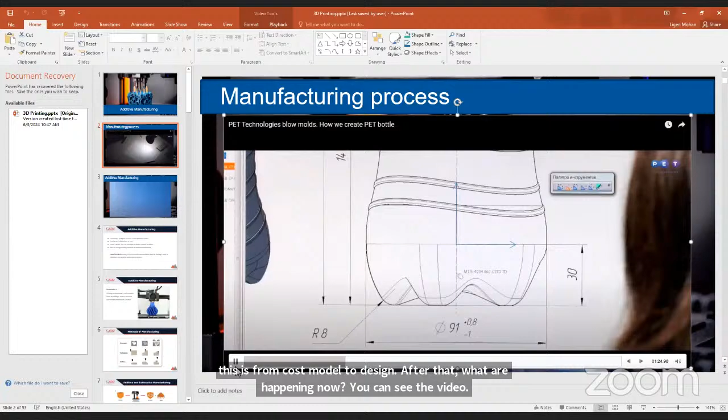After that, what's happening? You can see the video will stretch to more than one minute. But here it stops, right? No need of going to the next stage. Once we get the 3D model, that is what we need for additive manufacturing. Just think about it: it's a concept model going to a 3D model, and after that a lengthy process to get to the real bottle.

But when you go for additive manufacturing, once this model is ready and satisfies the constraints or parameters for the particular bottle, then it goes for manufacturing. Not a prototype. You can directly get the output of a real bottle immediately. So the traditional way takes too much time as well as being very costly. Designing and creating a mold is more expensive.

And there is no second choice. Once the mold is ready, you have to stick with it because there is no chance to do it again. If the design is improved and you make changes, the mold can't be used, and we already spent too much money on molding. So we just finalize and go for that. But with 3D printing, if the output is not satisfactory, we can generate another model or make modifications. It will not affect anything.

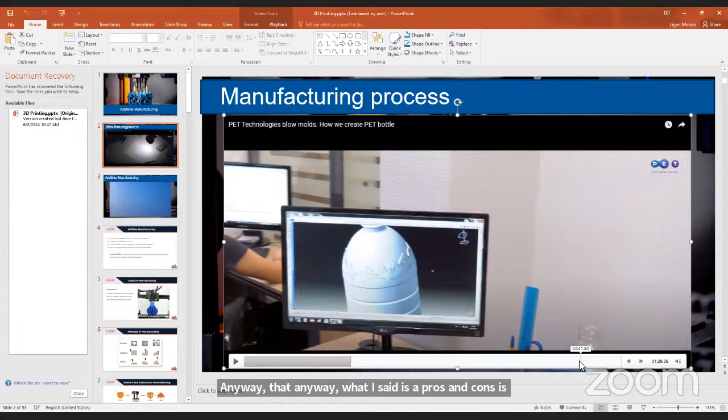Anyway, as I said, there are pros and cons. When you go for mass production, there is a lag between the traditional way of manufacturing and what we do in 3D printing. And what is additive manufacturing? A simple video for this also.

Just a minute. Can you see my screen? Yes, sir. You can see. Okay, fine. A small video.

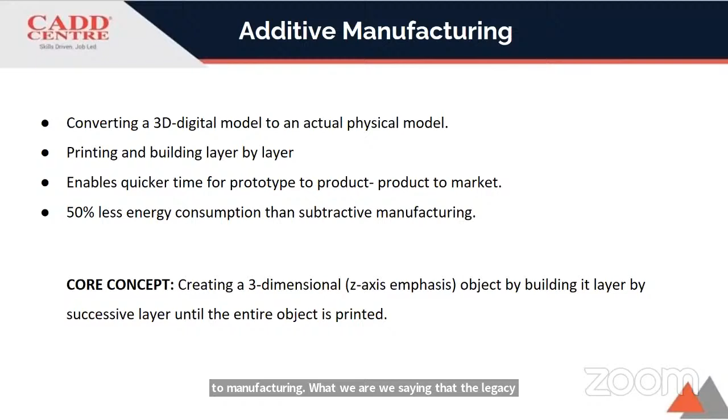And it enables quick prototyping and product to market. Nowadays whatever you want, you can just print out and use directly, with no waiting as in traditional manufacturing. It uses 50% less energy than subtractive manufacturing, the legacy type. We can't change that immediately, but it keeps going.

Now the lag is only for mass production. We have different types of printers available; even metal we can do. But the problem is when it comes to manufacturing at a vast level, or mass manufacturing, there is a question mark. There will be a lag in that. So for some objects we don't use mass manufacturing.

Mr. Tiraj sir told me they're using it for aeronautical and space research and all. In that case, we don't go for mass production. Whatever is wanted, we just make with 3D printing. In that case, 3D printing will be very much useful.

And the core concept: create a three-dimensional object. We can use various tools such as CATIA, SolidWorks, NX. There are vast tools available, but those are not the familiar tools; not only the basic tools are used. These are from German and French companies, so they are very good companies. Users the world over are using them. But now people will be pulled to 3D printing. So that is the next revolution, the next generation we will see.

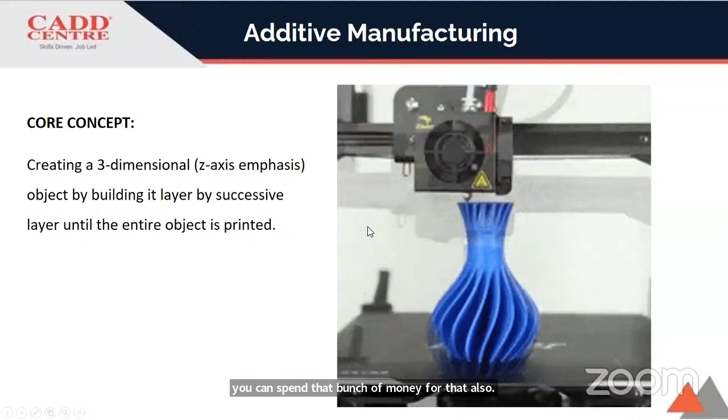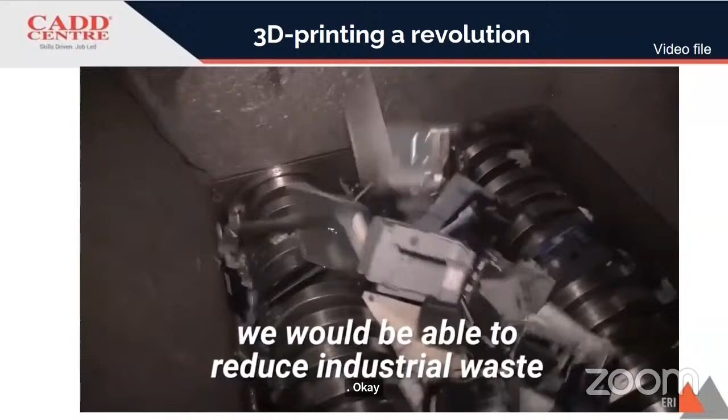The assembly line, providing a significant reduction in the cost of components, eventually leading to applied innovation. Even more so, we would be able to reduce industrial waste, try more experimental designs, produce finished products much faster, and create highly customizable products.

Restaurants would be able to 3D print dishes that are not just based on your preferences, but on your specific biologic makeup. You would see it used in the acceleration of space programs, with additive manufacturing becoming a key component to the future construction of our space colonies. Doctors would be able to print custom-made prosthetics and organs. Clothing stores would allow you to order designs completely from the convenience of your home.

This future is not too far off. How do you think 3D printing will impact your future? And do you think 3D printing's impact matches its hype?

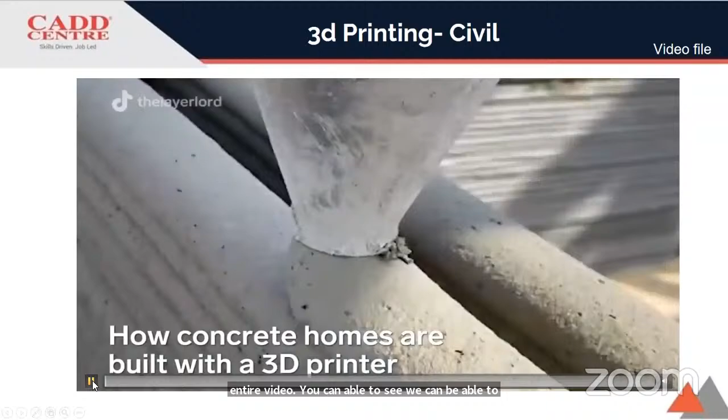Yes, so you can understand that there is no field where they are not used. Almost all fields can use it, not only the mechanical sectors or automotive sectors. You can see, I'm not going to run the full entire video. We can print an entire building with a 3D printer. It's a huge printer actually.

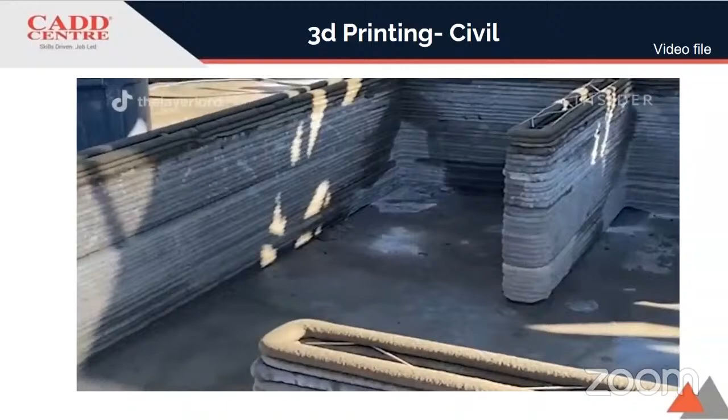Okay, so I hope you can understand, right? So you can use it in the engineering sector of civil and also the architecture side. Hope you understand till now, right? So till now, any queries from your side? If you want to ask any questions, then let's go to a few more slides.

Before that, I just want to know if you want to ask any questions regarding this. Now you can get a clear idea, right? What is 3D printing, and which industries are using it. And whatever is shown is very few. It's a vast range of industries using 3D printers. Do you have any questions or queries?

Sir, can we use this technology for the baking industry? Practically, has it been used? Is there any example you can give, around Chennai or somewhere, where any bakery uses 3D printing technology for making cookies or cakes or different wedding cakes or something of that kind?

Actually, sir, we are in Chennai. I'm not aware of that. At Bangalore, companies are doing it. I'm not sure about that, sir. But they are doing it in the pastry industry also. They are using 3D printing, and burgers and patties are generated by 3D printing. I'm not sure which company is doing it.

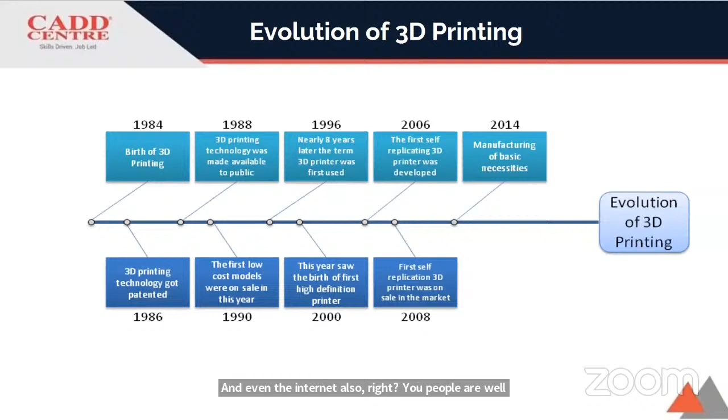So actually, it started from 1984 itself. Like that, all the technologies and software, like CATIA and NX, were previously used in defense, and even the internet also, right? You people are well aware of that. So once it is established, then it will go for the civilian version.

So we are not only speaking about a few areas like healthcare and construction, but also the food industries and bioprinting. I have a very good presentation we got from Hyderabad. The company is printing even the heart and kidney in 3D, but not for humans. They are using it at the mouse level. They showcased their printers, and the cells should not die while printing. They have a high level of criteria on that. So soon there will be a breakthrough in that.

Like food, biometric is also very important, because of kidney transplantation, heart and all. If we are able to do it in a printer, then it's cost effective and life saving also. So this should come first in my perspective. Fashion and architecture are already doing well in that. Then the jewel industries and replacement. There are almost no industries that are not touched by 3D printers. Mainly they're concentrating on the user end part.

For all the parts you need immediately, you can't get them, or you don't have any spares, because whatever we are manufacturing today in 2024, after 2 years we can't get the parts. That makes changing very difficult. Then we have to adapt and go for another new product or new vehicle. So if you have a printer, we can do a 3D scan, generate a model, and go to a 3D printer, and also go for jewel design.

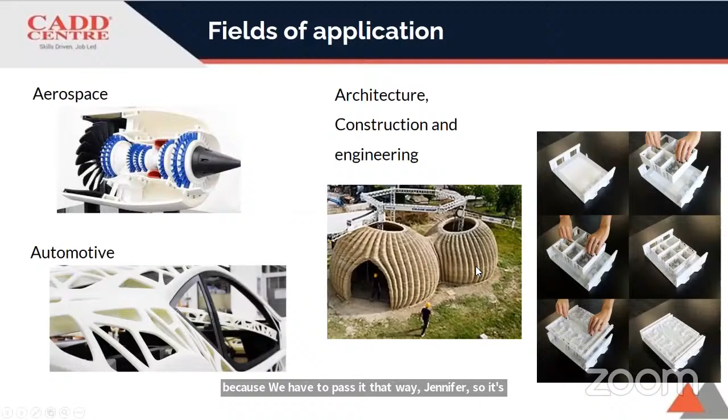And the workflow. So how do we do that? We start from the concept model, then we go for building a 3D model using our software. For the concept model, what we are normally teaching till now is paper with pencil.

Once the concept is developed, we go for clay, then it goes to the next level. Next level only we go for 3D modeling. Anyway, this is only for the slide presentation, I go for that.

Once the 3D model is done, we convert it into STL file format. Once STL is okay, it goes for printing. STL is a neutral file format, you can convert it to neutral file. There are many tools available, it's a free version only, not a paid one, and it's suitable for 3D printers.

Once 3D printing is over, it goes for post processing, because you want to make coloring, buffing, and there are so many processes to make it have an aesthetic look. Then once that's okay, painting and assembly, then it goes for output.

If you go for the same thing in a traditional manufacturing way, it's a lengthy process and the cost is too much heavy also. But if you think about mass production, then it's okay. At present, I can say it's otherwise more easy using 3D printing.

Only concept modeling, the file is not that much of a big deal. You can do it in 3D printing directly. We can just spend time on how to go for structural support and brims and all, then we can go for 3D printing. Only 3 steps, simple steps.

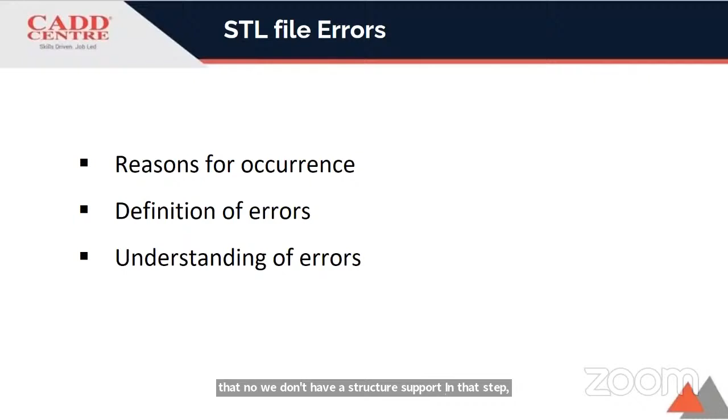The software itself nowadays - we are using Cura for that. In that software, they will show this, and you mandatorily have to create a support to keep the particular 3D print stable at some height. So that's a very interesting fact when you're using the STL file.

So here we can see, as I said, Cura, Prusa Slicer, Cura, and there's Repetier as well. Just take a screenshot. If it's a free software only, you just generate a 3D model and put it inside. You can see there are only a few options available. Cura has more options.

When you go for Prusa, it's very easy to understand what 3D printing is and how they're working. You can understand how the printer or software is working. Once you go for the printer, it's different because we have to set the base table and the movement of the object to zero level, check if the plate is perfectly horizontal or a little sliding, and sometimes you can't remove the print after printing.

That is also one problem we'll be facing. We will not remove from the base plate. So you can see, this is not too flimsy. If it is stuck with the bottom, if you pull this, what will happen? The feathers will come out.

So what we do, as a practical knowledge, we go for the glue gum, normal gum, the Fevistick gum. We used to put it on this plate and make a print so that it will easily come out. But initially it will be tightened because of a hot material. After that, you can simply remove that, it will come out. Otherwise, it will stick on the board.

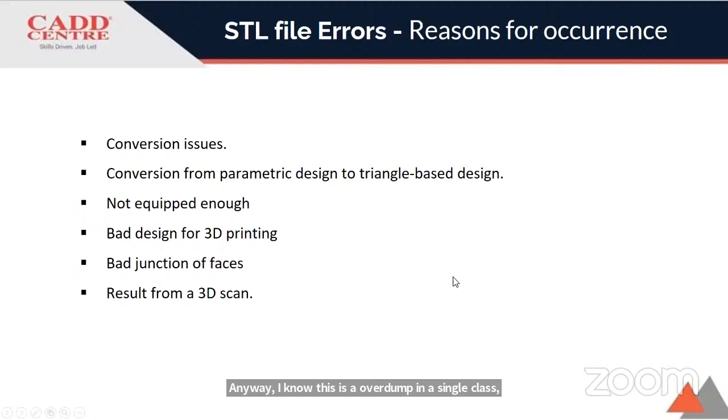Anyway, I know this is overdone for a single class, but I'm just giving the awareness of what we do in a 3D printer, what the behavior of 3D printers is.

And invert normal, if you have any bad edges or a shelled component, overlapping triangle, intersecting triangle, this is all the problems we get as errors when you go to print. Right, everything in the STL file, what you are getting from the STL file to convert to slicers.

Okay, this is the triangle, this is the triangle. When it prints, it will be printing in a triangular manner. If it is flipped or the normal is in a reverse direction, then it will be an error. So normally it will not come as an error if you model it in a proper way.

If you're going to twist the object in a different way, normally we used to go for a 3D model, we used to twist and get very solid to very complex surfaces. And in that case only we have a problem with that. But the 3D printer has the capability to create any type of model. But if it is a true model, then it's okay for that.

So this is what they are calling a triangle. So this is what a bad or nearly bad contour hole. If you have a hole, this is what I explained, right?

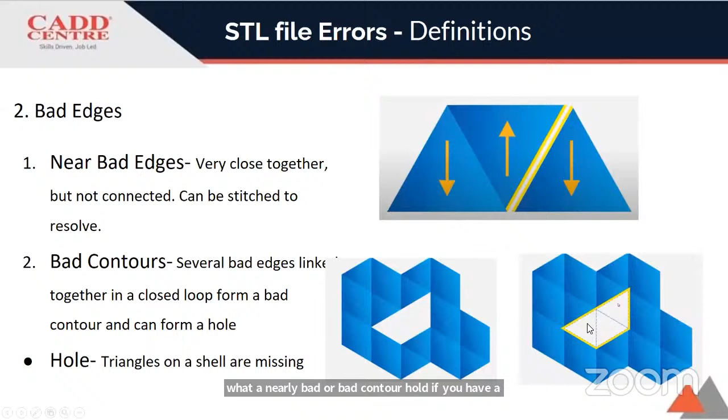If there is a gap, then normally when you go for a scanned model, we can get this type of problem. Same like that, shelled. Shelled means the object looks fully solid, but if you cut and see, there will be a shelled component. If it is fully shelled, then what happens when you go for the printer? It will not print, right?

It will, because it tries to only go for the outer, that top portion. When you go for the top portion, what will happen? Nothing. Again, it will be pouring inside. It will take too much time. Then you have to give structural support starting from the bottom; you have to give the proper way how to do printing in the solid thing, whether you want it hollow or solid.

Okay. So this is an intersection. If it is an intersecting object, again, you have a problem with that. So that is a noisy shell. Shelling inside the smaller part, the inner portion, the intersection portion will be creating the problem. And now you can understand this.

Here you can print up to this level. This is the triangular box, right? Your box will be printing at this level immediately. There is a gap from here, so it will not immediately come up printing. So here the brim will come and it will come up with the structural support. After that, it will be strong printing. From bottom to the top, up to the object level, that will be structural support. After that, it will go for the normal printing. So this is the instruction you have to give to the part.

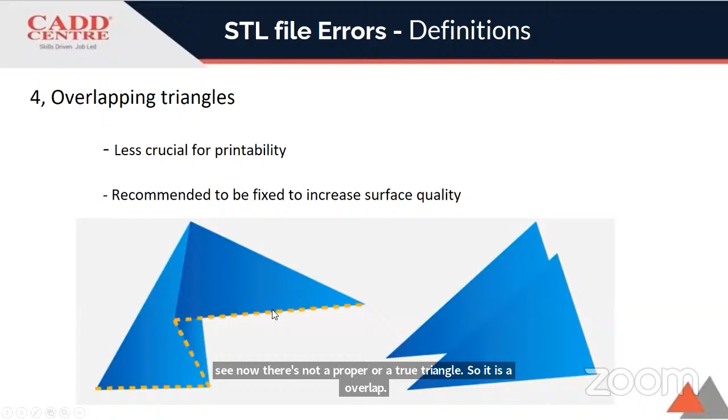Before 3D printing itself, you can understand what is happening in that. We have a solution for that. But whatever you want, you print, that is also an option. Whatever happens, you print. Then you can see it takes 4 to 6 hours, and then you are not getting a proper output. That will be difficult, right? If it is for testing purposes or a learning period, it's okay, but if it goes for commercial use, it will be difficult because time is a constraint. We have to do it better and faster.

Anyway, whatever we do, we have to practice on that. In printing technology there are options: directed energy deposition, photopolymerization, material extrusion, powder bed fusion, sheet lamination, binder jetting, and material jetting. So these are the types. Within 3D printers there are many types in different forms. I'll just go through them so that you get a clear idea. I'm not running the entire thing, as it would take time.

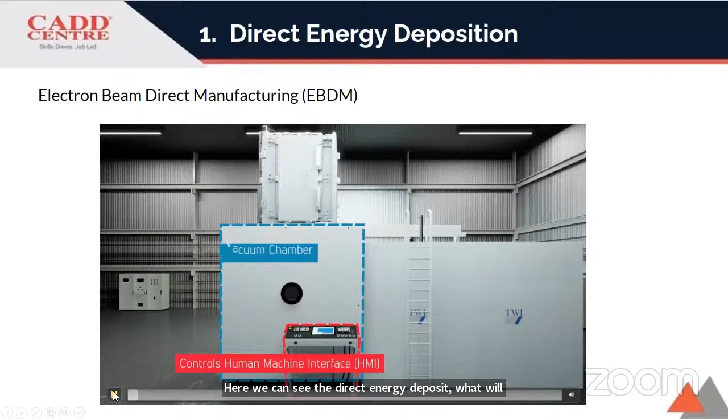Here we can see directed energy deposition. What will happen in this? There is no audio on that. Just mentioning the name. So this is the slicer, level by level.

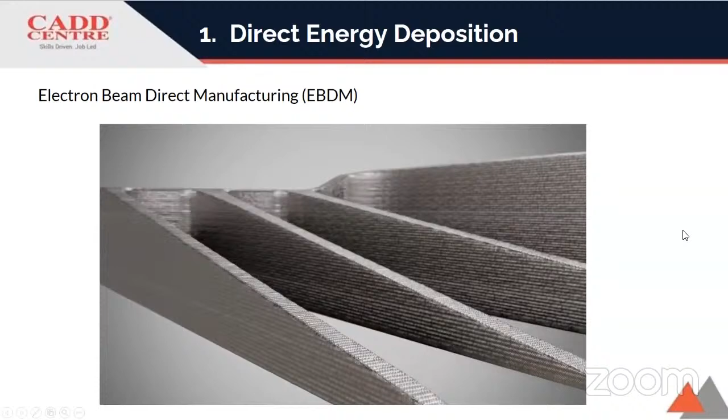It's a layer by layer welding type. So that's EBDM, which is used in vast areas.

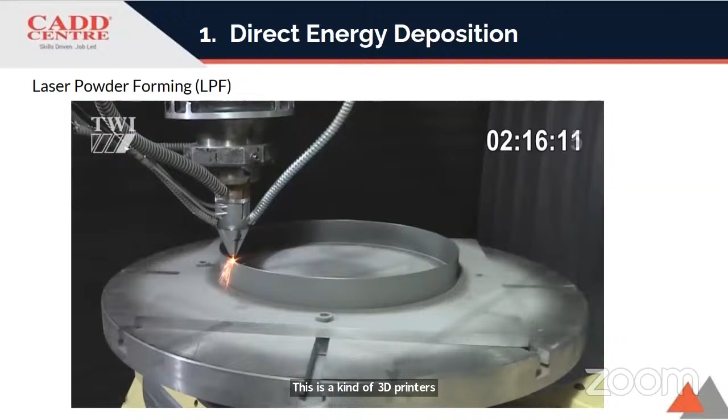So let's go for the last print, right? So this is the output directly. This is LPF, laser powder forming. And there's digital light processing, DLP.

So in this, we can go for very complex shapes also.

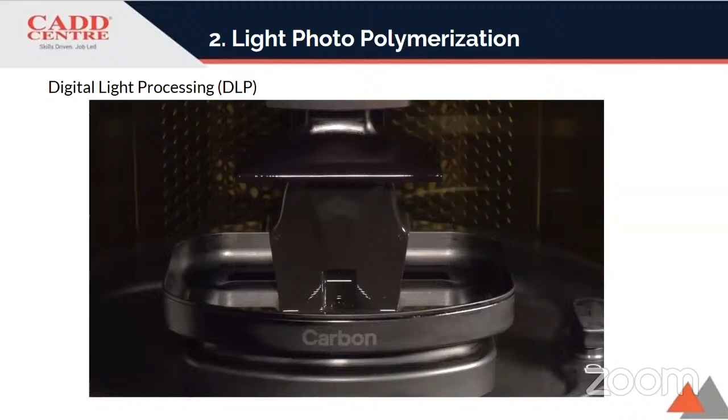So it's interesting, right? DLP. Then SLA, stereolithography.

This looks like some science fiction movie, but it's real. So this is additive manufacturing.

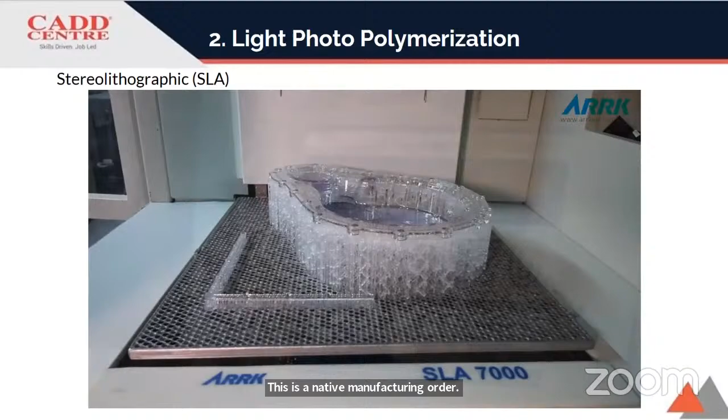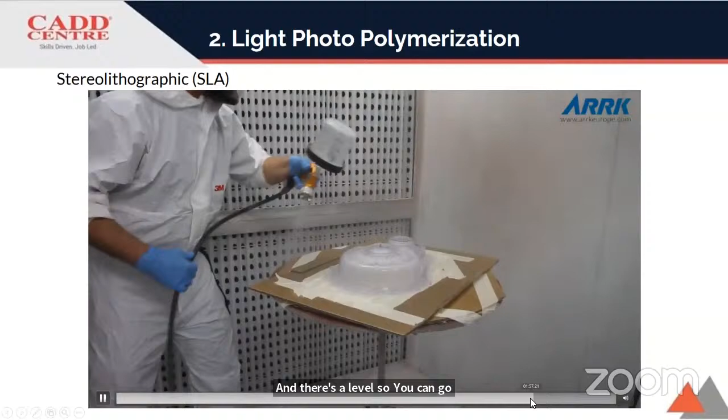You can see these supports and brim. So this is the actual object, but you can see this on the support, right? What I said: if it is hanging outside, then how to make a print? So this is a structural support. And this is a level. So you can go for different post-processing, then you can get a final output like this. And it's not a prototype. This is a working model, we can directly use it in place where we go to utilize this.

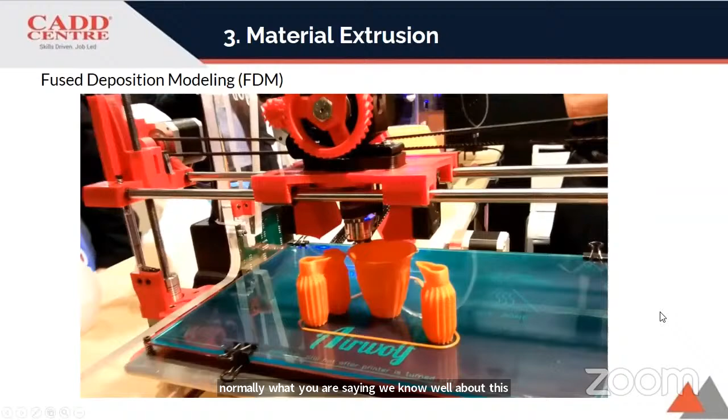Okay. And fused deposition, the material extrusion is normally what we are saying. We know well about this. FDM, right? This will come under the FDM. And metal laser, DMLS.

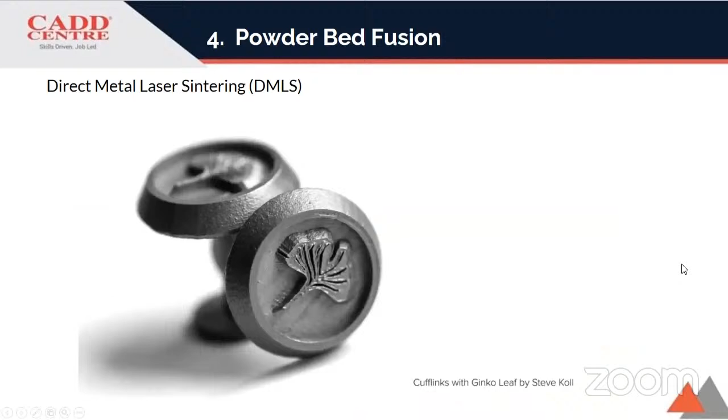The using of metals. And same like that, there is electron beam melting. That also is kind of the same, but we don't have a proper video for that. And then SHS. This also comes under the powder bed fusion.

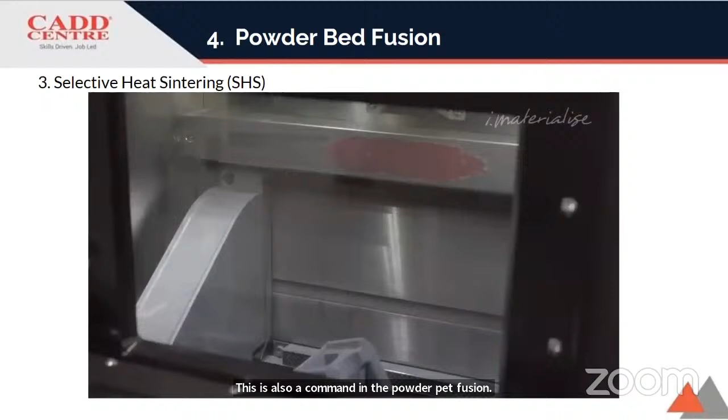And this one normally all the car companies are using. I'm just introducing the type of printers in different variants and variant usage also. Whatever we are seeing, the traditional is different.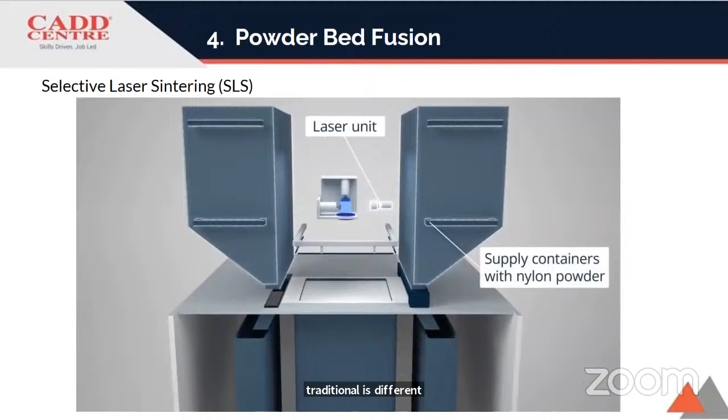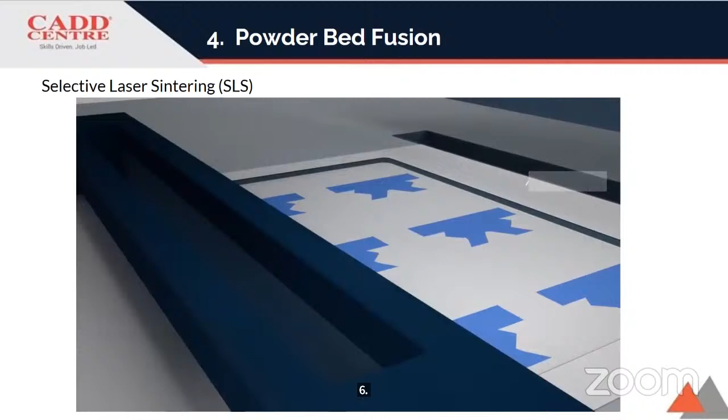Once the printing process is complete, the build chamber cools down to ensure optimal mechanical tolerances and performance. The finished parts are removed from the build chamber, separated from any excess powder. SLS printed parts can be post-processed, if necessary, to be smooth.

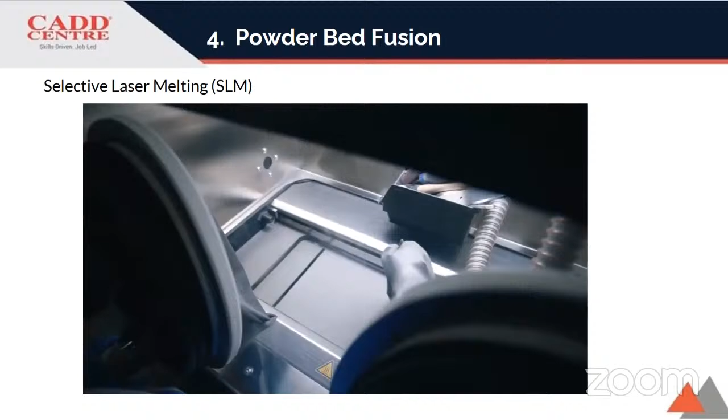Okay, a few more to go. This is SLM. Okay, good. LOM. This comes under the sheet lamination.

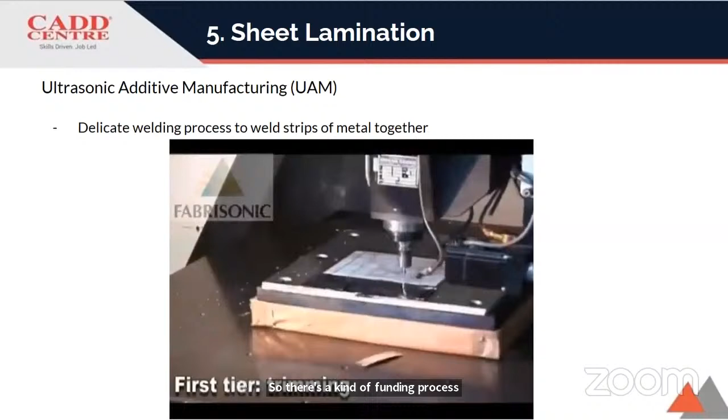Good. So a few more to go. So it's UAM, ultrasonic additive manufacturing. So this is a kind of welding process. So it's like embossed in a sheet metal directly. Good. This also comes under sheet lamination.

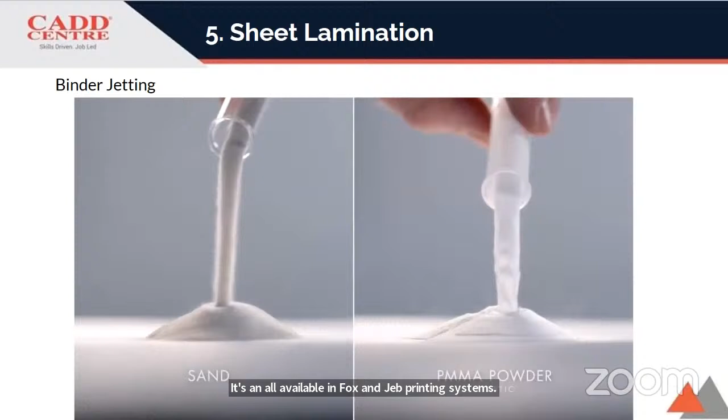The chemical 3D printing process, powder binder jetting. The 3D printing process runs on all available voxeljet printing systems with a variety of different particle materials such as sand, plastics, or freely selectable powder materials. The only requirement is CAD data of the part. The process starts with the application of the loose particle material to the building platform by a recoater. Afterwards, the print head applies the binder selectively at the areas where the future part is to be produced, thus connecting the layers.

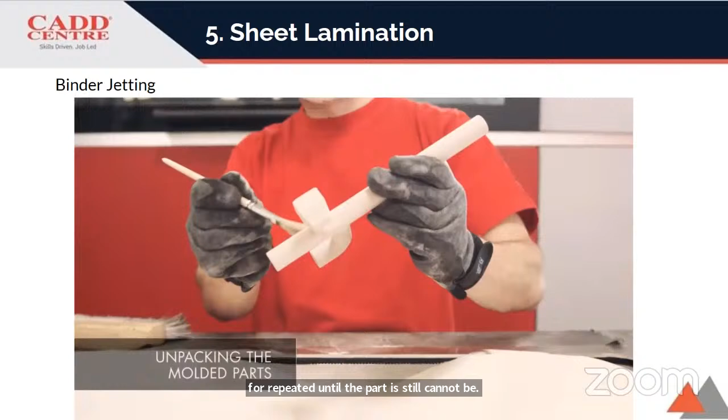After the binder has been applied, the building platform is lowered by the layer thickness. This process is repeated until the part is completely finished. The unprinted particle material is removed after the printing process. The models can be used directly for metal casting or as design and function models without time-consuming post-processing. Find out how voxeljet can optimize your production.

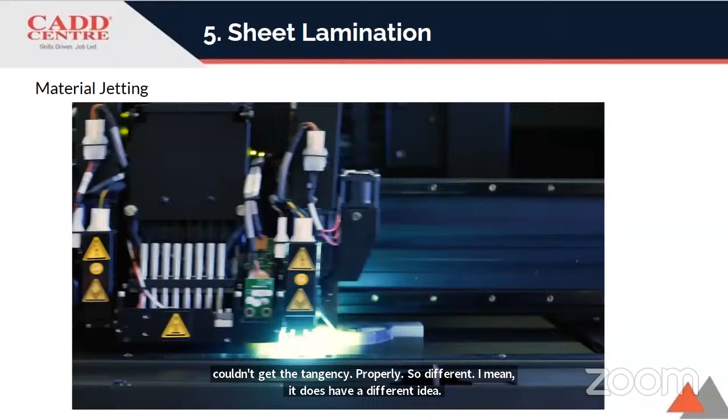Okay. And normally what they show in this, in a horizontal manner, it's not easy to print in a normal type of printing. What we do, we go vertical and make a print. With horizontal, we can't get that tangency properly. So different printers have different ideas. So this comes under material jetting.

So in conclusion, we are almost at the end of this session. The type of material which is used: ABS plastic. Why are we using ABS? Because it is strong and durable, impact resistant, with structural strength. And the temperature will be 220 to 240. Here the temperature and bed temperature are very important. Why? Because whatever filament you are going to insert in the 3D printer, you have to maintain that degree to melt that particular material.

And the bed temperature, the bed is nothing but the bottom surface, right? Normally it will be glass, or any kind of material or metal part. You have to maintain this temperature for the bed, otherwise the bed will get cool and the print will not settle on that glass or wherever they print. This is very important. Whatever material we are going to use, we should know its temperature.

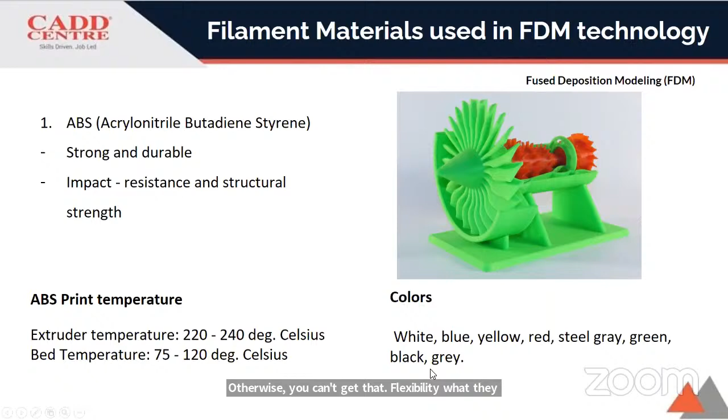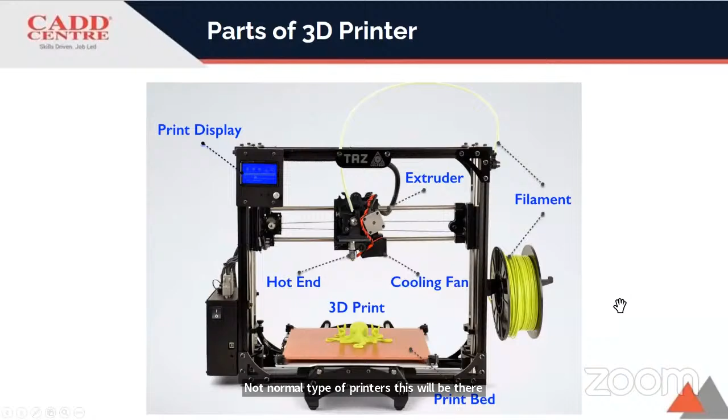Okay, so this is a bit lengthy, but it's not only the printers. There are different types of printers, how they work and all. I know that, as I'm a teacher same like you. It's a single presentation; too much information will be an overdump. But whatever you understand, keep it in mind, and do at least one 3D print as a full process. That will take only 1 hour. For the 3D model, take SolidWorks or whatever. Just do a rectangle, extrude, that's enough. Go to Cura or Prusa, slice and print. That's all. Then you get the confidence. Then you can go through all the printer types and everything. That will be easier and more understandable.